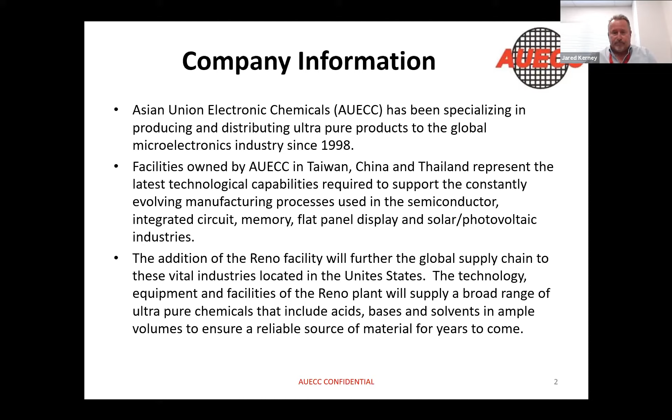We've been in the building since 2017, working through the adjustments of their processes and adjusting the building to our processes. The walls of the building, the structure, the foundation, and some of the equipment from Alcoa turned out to be a perfect match. And then where it wasn't, we've gone and done the necessary demolition work.

We have about 110,000 square feet of building space in the main building. And then we have some outer buildings that will support some of our other chemical distillation, such as solvent distillation and solvent storage, just from a safety impact. We're really focused on the environmental impacts and safety aspects because of the materials we're dealing with.

AUECC does not generate or produce the molecules that we're cleaning up. We purchase industrial grade materials from various sources. Some of the sulfuric acid and some of the anhydrous ammonia will come right out of the Martinez, California or Stockton, California areas. Some of the nitric and hydrochloric acid will also be domestic and then also Asia supplied.

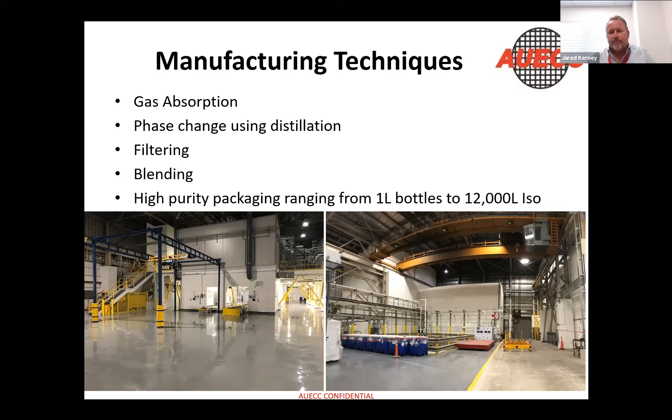All of these materials are in high demand with the chip manufacturing because it's an all-time record. The output and the growth in microelectronics will continue. So it's important that we're able to provide the necessary chemicals they need for their growth as well.

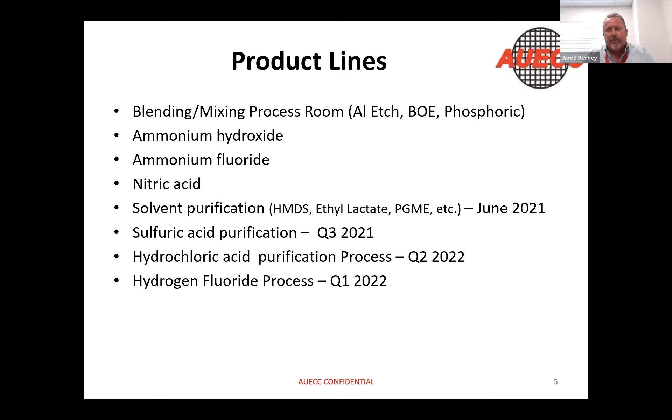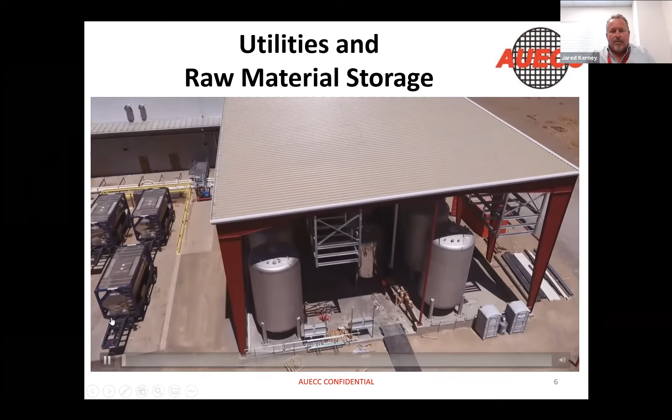The tank farm, we have 14 tanks in there, ranging typically in about 5,000 to 7,000 gallons worth of product.

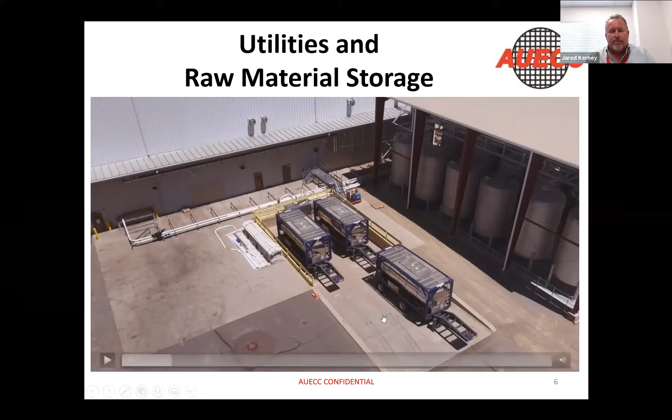The ISO containers I was talking about, this is our fleet of 12,000 liter containers. They're a stainless steel vessel that's Teflon lined to ensure that the materials we ship are kept ultra pure, not picking up impurities from the containers they're sitting in. And we have several hundred of these in our company that we're able to dedicate to the customer, to the chemistry, and be able to have enough of them floating around to make sure that they're not going to run out of supply.

We're going to see the back part of the utilities of our facility. As I said, we're sitting on about 53 acres of property. When we did the initial concepts of the business, we wanted to be able to sustain here effectively in the event of power outages or water shortages.

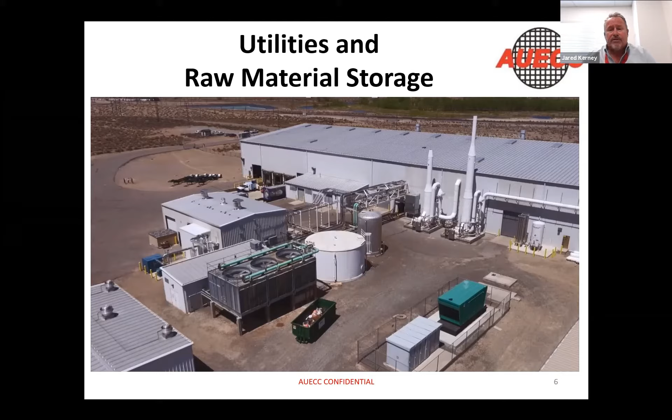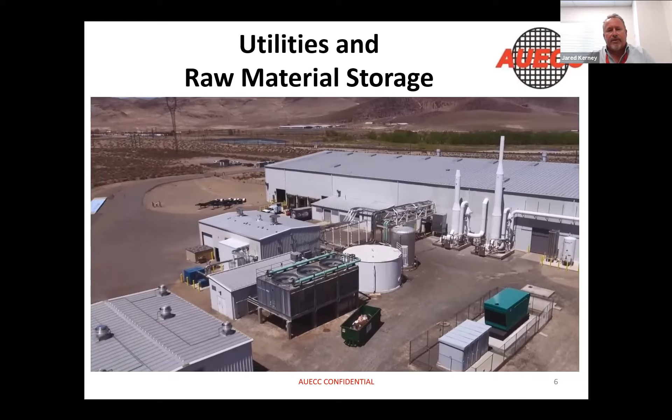I'll go ahead and continue with the fly around. Our shipping department is on the west end of the property, so we have docks to load drums and totes into dry vans or refrigerated containers for chemistry environments so they don't freeze. Some of our chemistry freezes at 50 and 65 degrees Fahrenheit.

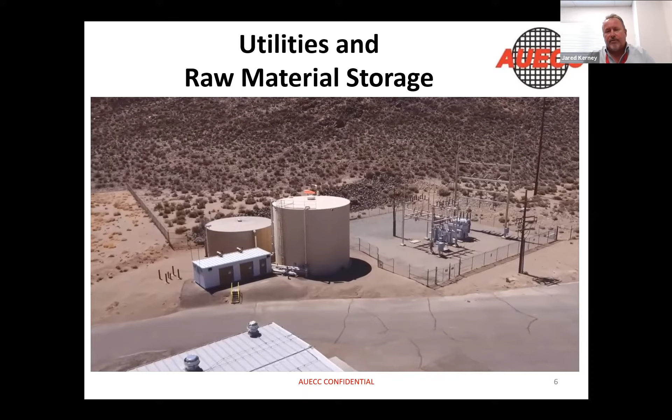We're swinging around, you can see we have a great power supply coming right off of NV Energy's power station into our local distribution here. We also have two fire tanks in the background. We're fully set up with our own fire system, holding 300,000 gallons of fire water on site. We also have two Detroit diesel fire pumps to pump water through our system.

You'll see in a few minutes we have boiler capacity, and we're targeting almost zero discharge here. Other than domestic waste, we will neutralize all of our waste generated on site, distill it, and reutilize the clean water in our cooling process. Any condensed solids that come out over time might be a small waste stream we send out, but we're very proud of the engineering we've put in place to minimize our environmental impacts.

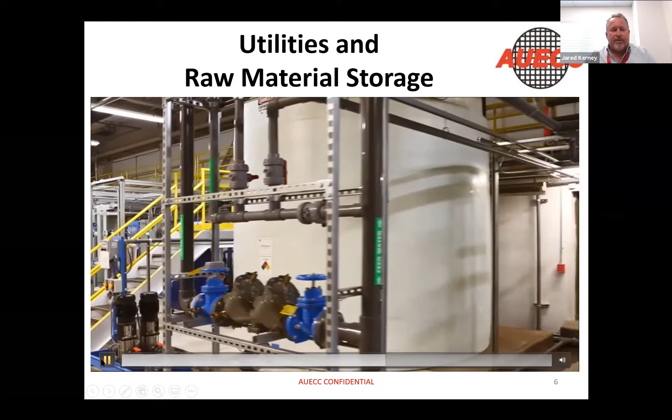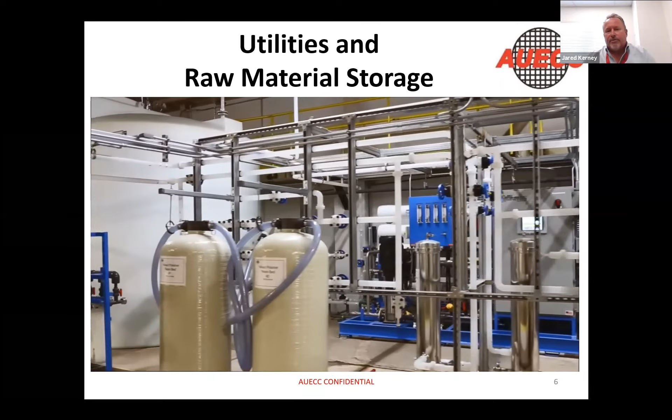This part of the photo is kind of the backbone of our plant. We're on well water here, and we use our well water to make ultra pure water. Ultra pure means we reduce all mineral content and metals in our pure water down to parts per trillion, targeting 10 parts per trillion on most materials except boron, which is very prevalent so we have a higher standard on that.

Overall, our ultra pure water system consists of sand filtration, softened water, an electrodeionization unit (EDI), a reverse osmosis unit, mixed resin beds, and also ultraviolet light to mitigate any growth. That water is extremely important when we start mixing ammonia gas with it to make ammonium hydroxide, one of the critical materials chip manufacturers need in their process.

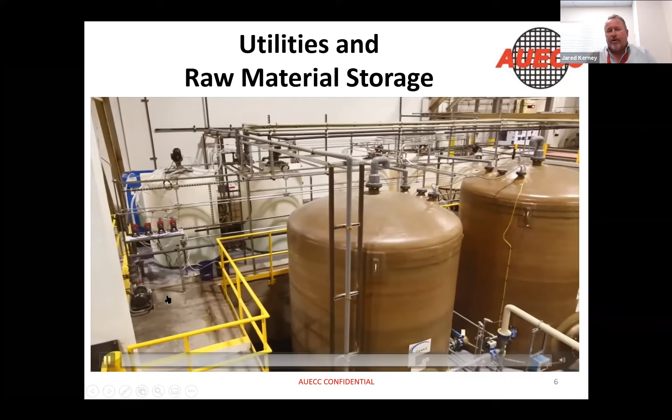I'm going to pick up the video again, and you'll see in the background our waste neutralization center, where we're able to neutralize any acids or bases in our system, bring them back to a pH of 7, and put them in these brown holding tanks. When we have enough capacity, we'll move that to our boiler to distill the wastewater, and recover that distillate to put in our cooling tower so we're not discharging to the publicly owned treatment works. We have quite a capacity here to maintain washing, cleaning, and any ancillary waste that comes out.

This is another photo of one of our utilities. The silver unit is our evaporator that we use to clean up and distill our wastewater, and you'll see the boiler in the background.

The utilities we put in place here at AUECC were really not just to look at our current needs, but to give us expansion capabilities if we wanted to continue to grow and max out our business here.

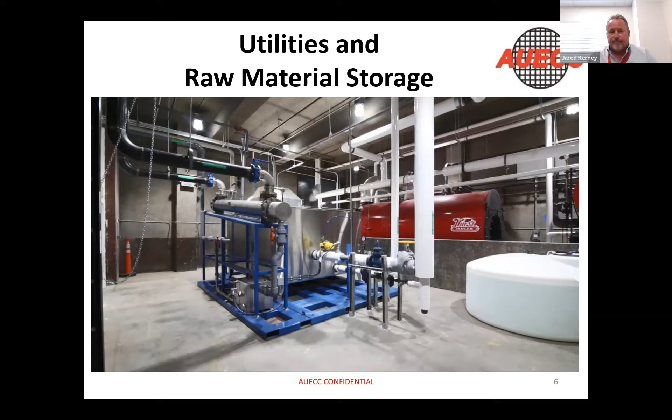These next set of photos, you'd be leaving the front office and starting to walk into the main plant underneath the 100,000 square foot building. And when we took over the business from Alcoa, we had to do quite a bit of retrofitting in the plant to come up to current life safety codes, the current fire safety codes.

And we invested quite a bit of money to build unique process rooms for each chemistry. These process rooms are really designed for containment, for purity, for housekeeping, and also to just give a single focus for that chemistry, so there's no possibility of any contamination from any other processes.

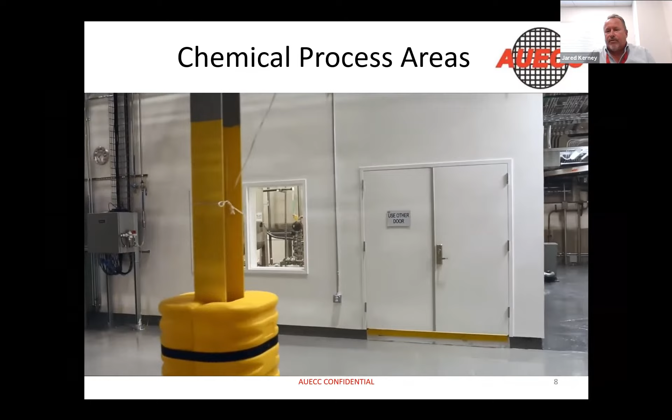We were walking down the aisleway, which will come through our blending and our ammonia rooms, which is ammonium hydroxide and ammonium fluoride. You can see on the walls the blinking green light is an andon light to help our operators know that there's no leaks, there's no risk of any atmospheric air shortage due to the use of nitrogen in the rooms. We also have sensors for ammonia detection and acid gas detection.

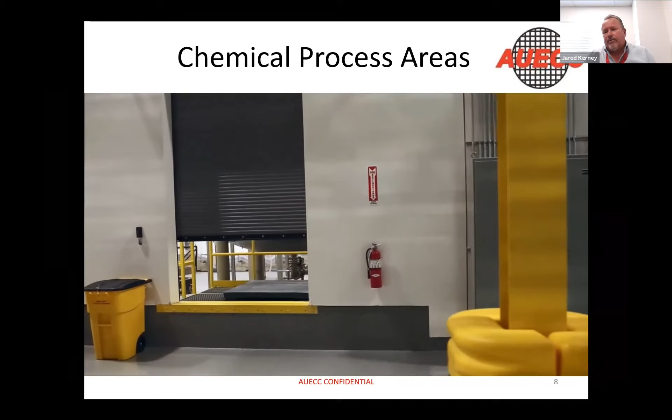They're all contained, like I said, with viewing windows. So if our customers come in and want to get an up close look and do an audit of our facilities, they'll know exactly what we're doing. The rooms have human machine interfaces, or HMIs, for the operators to open and close valves, and also to make any adjustments for flow of materials or turning pumps on and off.

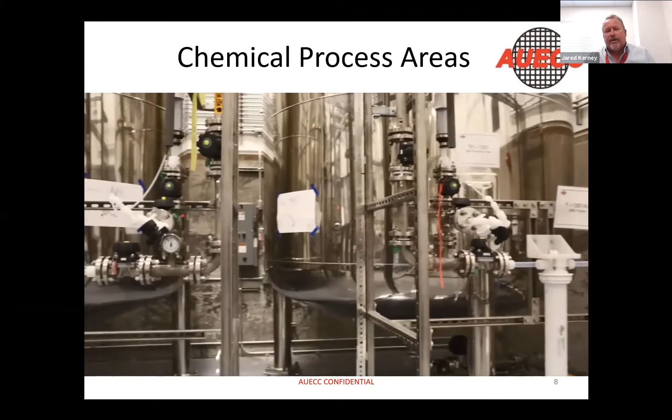This is one of our blending mix rooms. So not only can we make dedicated chemistries, but there are occasions when we'll need to mix a phosphoric, a nitric, and acetic acid together, or some variation, including a surfactant. These small blending tanks allow us to do small scale production to meet those unique R&D needs of our customers.

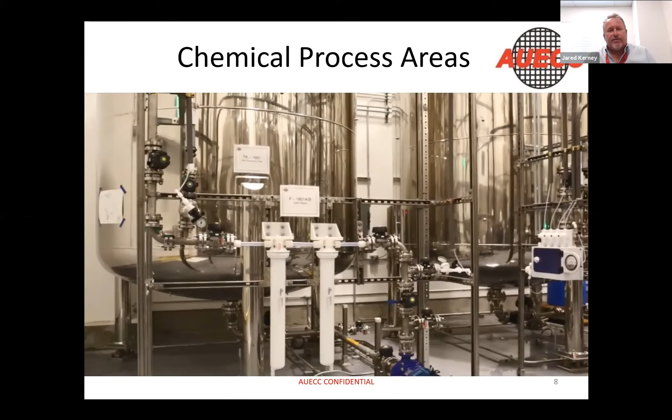And we're seeing, as chip manufacturers are continuing to look to improve their process, we're also trying to give them the competitive edge for doing research work.

The room that you're seeing here is an example of a process room. They're probably 40 by 40 with about a 45-foot ceiling. They're all contained with emergency exhaust system, leak detection. And then all the piping here is very unique and specialized to AUECC.

Obviously, it's stainless steel on the outside, but on the internal linings of the equipment here, it's all Teflon coated, with some proprietary development that we did with some of the manufacturers of this PFA and PTFE linings. That lining helps keep our chemistry clean as it's processing through the plant. So everything you see has basically got like a garden hose, an ultra pure garden hose running through it, that will last for years and years to ensure what we produce here will meet their needs.

This is the ammonium hydroxide, where we'll take anhydrous ammonia and we'll mix it with water to make ammonium hydroxide. And we'll scroll through and let you see the next room too, which is ammonium fluoride.

You can see the sampling stations, the spill containment pits, the gas detection on the walls. And the little kiosk is the human machine interface where the operator will be able to monitor the process and optimize this batching process.

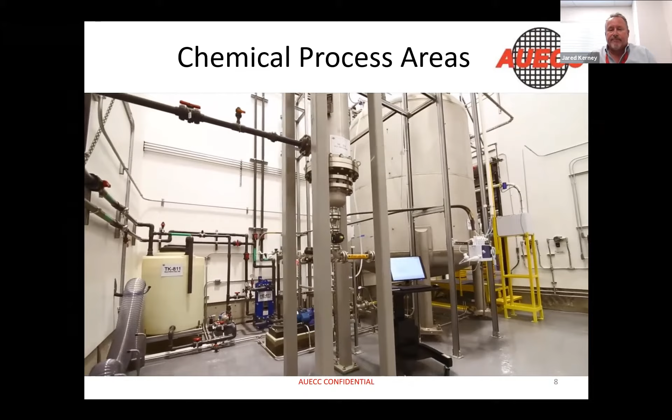This room right here is one of the rooms that is currently in construction. This is nitric acid distillation. So unlike the ammonia rooms where we're doing some gas absorption, now we're going to start to purify our acids using high temperature and boil the product, recover the vapor in distillation columns, and then filter it and then package it.

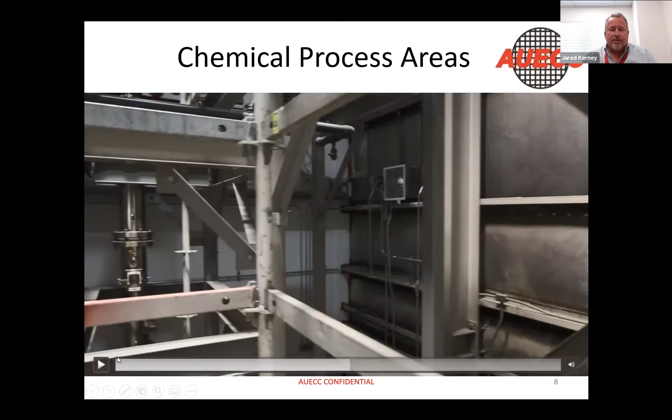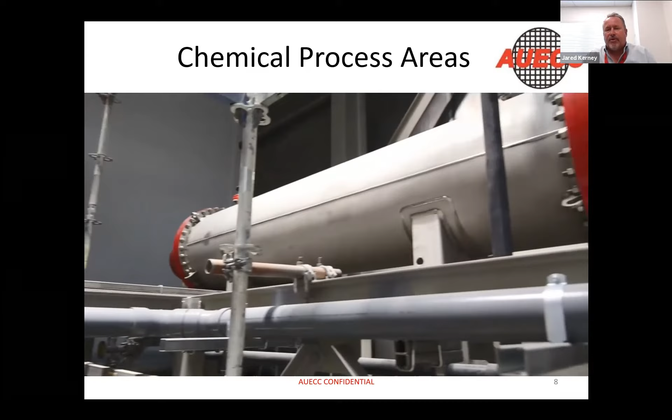This is a little hard to take a video of just because of the scaffolding and some of the support structures we had to put in place, getting ready to interconnect the process piping. Again, if you look at it, it's all stainless steel on the outside, but on the internal guts, it's all lined with high purity Teflon.

This process is one of our exterior buildings. We also do solvent distillations. We're going to be looking at 3 distillation processes in this video. First one is HMDS, or hexamethyl disilazane. We'll be looking at ethyl lactate and also cyclohexanone.

Some of these materials are smaller quantities. These are done in typically drums or 1-liter containers. This room is really unique just because the other materials that we deal with are very strong acids or very strong bases. This room, because we're distilling flammable liquids, takes on a little different safety requirements in which we have to look at electrically rated or electrical hazard classifications for sparks or explosion suppression, etc. So we have a different type of gas detection in here, different type of equipment design, just to make sure that we don't have an incident regarding this type of material.

You'll see in the background that the distillation units are pretty similar to if you take any chemistry classes where you're boiling and distilling and collecting, it's very similar. It's just been scaled up to an industrial scale to make these.

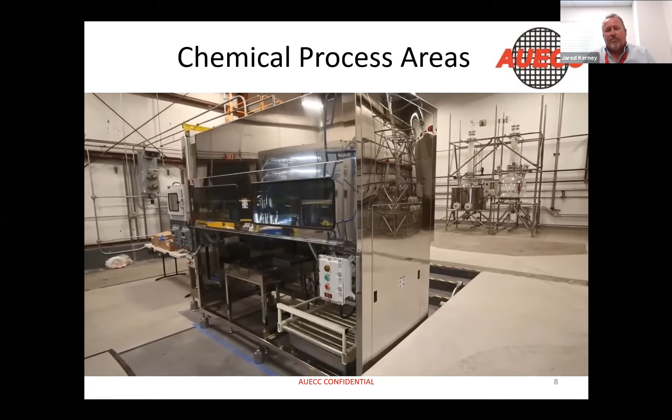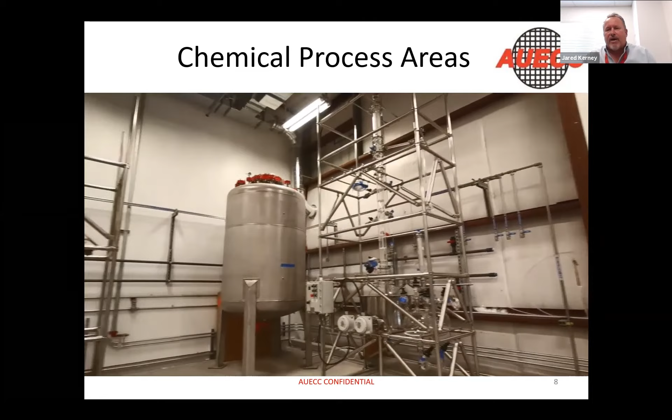The distillation units we have for sulfuric acid are about 10 times bigger than this, but for the solvents, this will give you a good idea of the size of production that will be going. The filling station looks like the Airstream unit on the left, where we'll be filling drums of product, and these are the distillation columns we'll be loading up with chemistry in the next 3 weeks to start our first batches in R&D qualifications with our customers.

They're very similar to your high school or college chemistry class arrangement for chemical trials that we used to do.

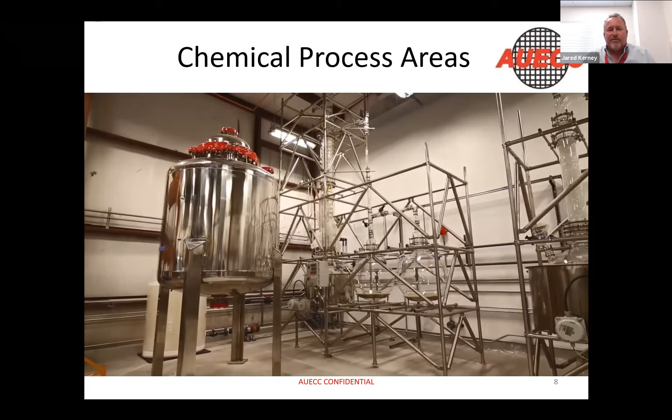This is our sulfuric acid room, currently in construction. We've been working on this room for about 8 months now. Sulfuric acid is one of the primary materials chip manufacturers utilize in their manufacturing process, and this by far will be our biggest throughput of material in the plant every day.

This is one of 4 trains we envision building here on site. We hope to look at building train number 2 late next year or early 2023. Sulfuric acid is a very aggressive material with a very low pH and a very high boiling point, but we'll be boiling it at 600 F to distill and recover it, then filter it and package it once it cools.

This gives you an idea of the infrastructure inside the room for managing an aggressive chemical like that. These vessels are all stainless steel, Teflon lined. The unique difference of the distillation columns here is that they use pure quartz distillation columns, since standard borosilicate glass would not withstand the distillation process. So we use pure quartz in these areas of distillation.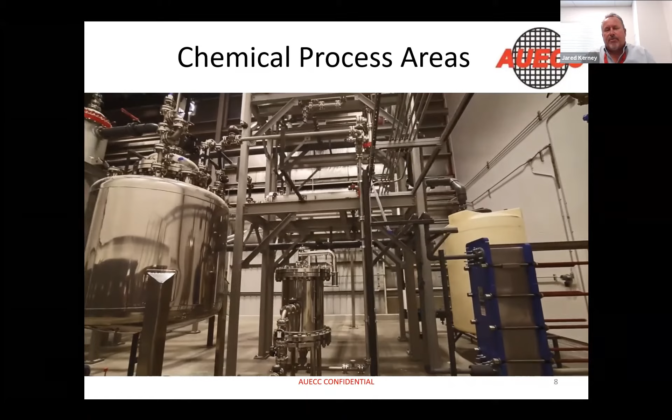Within the process there's always double containment, plus spill containment, and separate isolated cooling loops, so if there's ever a breach in the cooling system it will never get back to the cooling tower. We've gone to great lengths to really isolate these chemical rooms from supply and exhaust ventilation, let alone emergency ventilation.

We anticipate the sulfuric acid room to come online later on in July. We hope that by the middle of July we'll have customer samples available for our North America customers.

This is another one of our process rooms that we'll be utilizing to do some gas absorption. This permitting process is actually going to start taking place next month with the chemical accident prevention team down in Carson. We'll be moving forward with the capital investment in this process. We got some of the tanks early on when the plant was being commissioned, but the integrated process piping and all the other cooling loops will come on in our capital investment in Q1 of 2022.

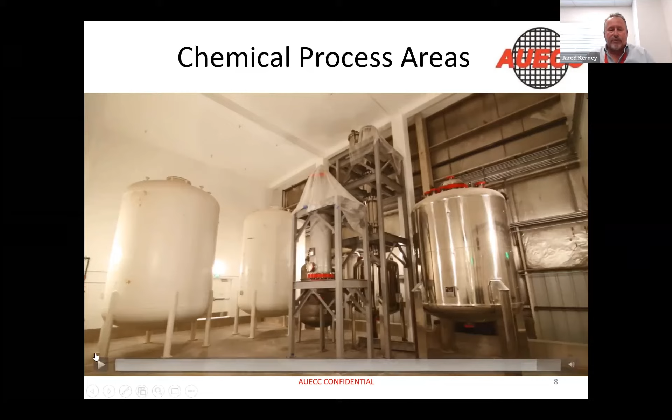This is another unique room. We cover all the major acid groups — this is hydrochloric acid, which is going through its permitting process with the state of Nevada. Unlike sulfuric acid, it doesn't require that special permit. Hydrochloric acid will be produced in a smaller quantity, but is very necessary for unique manufacturing needs within flat panel solar and microelectronics.

This gives you a rough idea of the room size and some of the initial heat exchangers, holding tanks, and stripping columns that will go in. The towers shown in the background will support the glassware used in the distillation process.

I was really surprised to see the solvent distillation units — they're about as tall as a big Christmas tree. But these in the hydrochloric room are a quite different distillation process; these distillation columns will be 32 feet tall. So if you can envision glassware in the room in these structures, purifying that acid to parts per trillion levels with very low particle count — this is something we're very excited for.

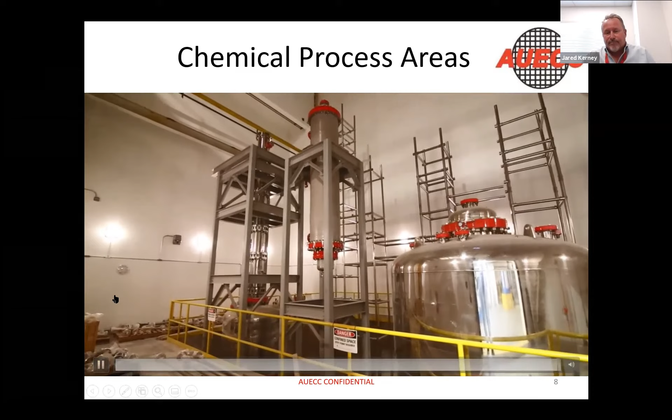This is one of our holding tanks as well, for anhydrous ammonia. AUECC has done a lot of great things in regards to safety — making chemicals of this nature is nothing new to us, so we've taken some of the best practice learnings that we did in Taiwan and China.

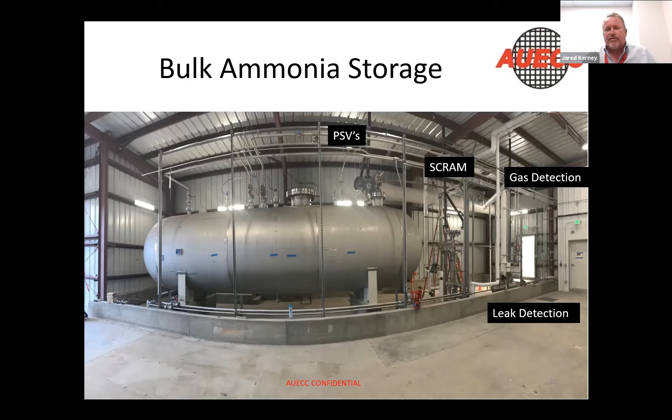One thing I wanted to point out is this emergency exhaust ductwork. If anybody's gone to a farm and seen anhydrous ammonia used, you'll see a tractor pulling a container and raking ammonia into the field — if there's ever a release, it goes to atmosphere. In our scenario, we'll be able to recover the release through our wet scrubbing unit, and this is the ductwork in the back. So when our gas detection detects any ammonia vapor above a targeted level, our scrubber will ramp up and activate, mitigating any release within this room.

This is our packaging unit I'm going to walk you through. So like I said a little bit earlier, we were able to fill a 1 gallon container. We can do a 55-gallon drum. We can do a 265-gallon IBC, or intermediate bulk container, or one of our own fleet of ISO containers, or one of the 6,000-gallon portable tanks that we can move around the world.

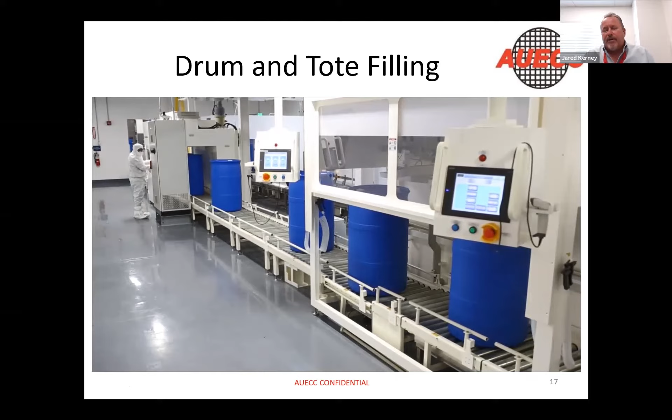Here's one of our operators. This is very early in our commissioning, so it's fairly new, but you can see the clean room expectations where the operator's suit isn't really protecting him, but it's protecting our chemistry from particles that we may shed or introduce. Potassium, magnesium, and calcium are all materials that at 10 parts per trillion, it takes just one particle in 500,000 gallons to make a difference.

In this room, it's all cleared for climate, meaning we're also checking the air coming in and trying to reduce particle contamination. We'll wash and fill with ultra pure water in each one of these ultra pure containers, and then pull the screen down when we're filling to protect the operator. The other unique thing with the system is we'll utilize barcoding and a key lock system when we fill the containers to make sure we don't cross mix any chemistry as we're filling the various products in these drums.

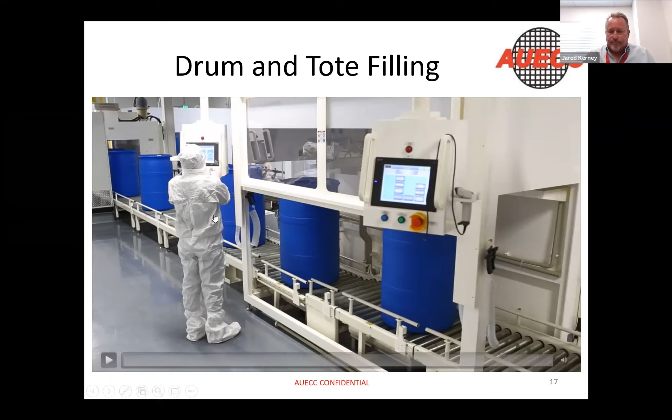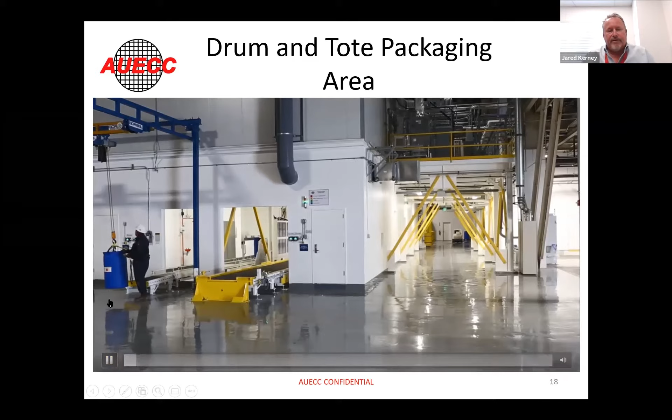Once the products are packaged down the line, we're going to eventually have to load those onto pallets for our smaller quantities. You can see our drum crane there, staging materials. We'll palletize, stretch wrap, label for the DOT requirements, and get those ready for our dry van shipments to hit our customers.

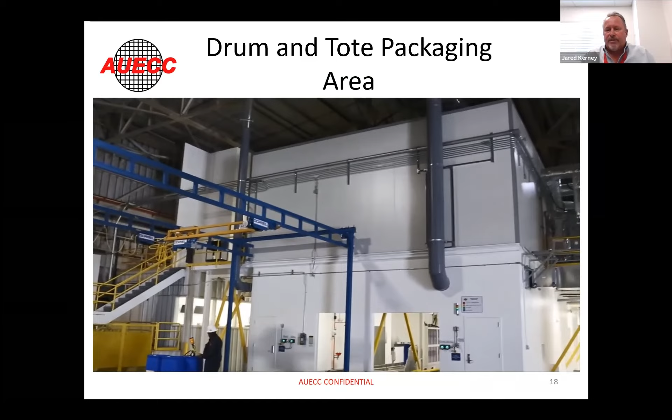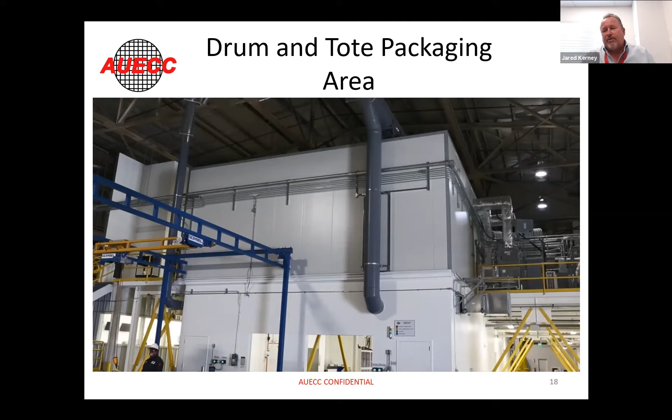As the video points up top, by design we put our laboratory right above our packaging line, for the sole purpose of not only in-process monitoring, but as we're filling our products, we want to do random samples for the beginning, middle, and end of the lots for traceability. Our lab is able to quickly grab samples and run them through the lab to make sure before we release these things for shipment that we've met the customer expectations.

I'll move over to one of the ISO containers here as we're pulling it off one of the flatbed trucks that just dropped one of these units off, as we're training our team to utilize our crane and utilize our storage space within the building. You can see the scale in the background, a red scale—that's what we'll use to weigh the containers to fill content.

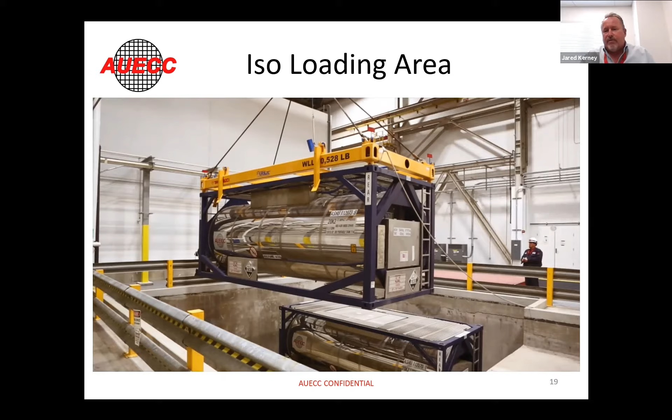And everything is done indoors. Again, it's for purity reasons that we want to make sure that we don't have the desert sand that we're surrounded by contaminating anything around the filling connections, around the filling ports, and so on. So that way, when they're on the road, they're ready to go.

Here's a snapshot of three of our chemical storage rooms. We meet the H3 occupancy requirements. We're storing our materials, and the rooms were designed for climate control to make sure that they don't get too warm and build pressure in the container, or get too cold. The acetic acid likes to freeze right around 61 degrees F, so in the wintertime, it's something we have to be conscious of.

The rooms are also equipped with plenty of spill containment. And even in the event of a fire, if our sprinklers would go off, we're able to recover any fire water that would be dispensed in the room to an underground holding vault, along with the contents in the room. So by design, we are set up fairly well to be able to handle and store our products safely.

I'll walk you a little bit through the lab. If you're making ultra pure products, you have to be able to validate the materials by a certificate of analysis. And we have a clean room lab that we believe is best in class to be able to measure down to the parts per trillion.

This is kind of an envisioning—we'll show you a video of the operator walking through the door. The door is closed behind you for an airlock, and then you come in to do your laboratory work. The room is divided in half, for a couple of reasons—we're trying to meet different clean room requirements. We have a class up here on the right, it talks about clean room and mini environments. We have a class 1000 wet lab.

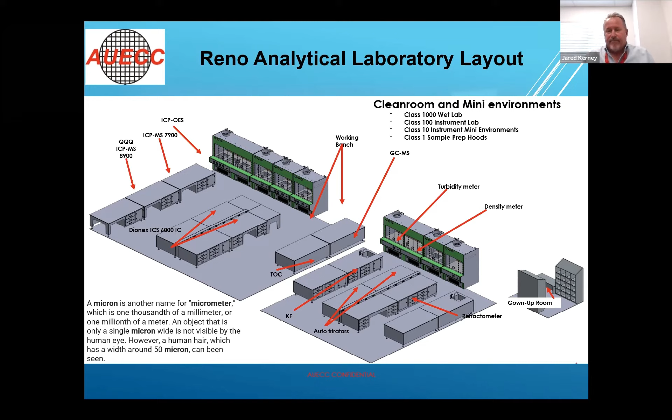These are some of the tests we do with our products: titration, turbidity, surface tension, density. Trace metals is very important to our customers. If you're building a microchip or semiconductor at 7 nanometers, you can't afford to have a small particle drop between that circuitry and short it out. So we're measuring our trace metals down below sub-10 ppt.

I put a little definition down below there. When we're looking at one drop of impurity in 500,000 barrels of water, or traveling 6 inches out of a 93 million mile journey to the sun, this is what we're trying to achieve when we talk ultra-pure. Some of the inductive coupled plasma, the ICP testing machines here, are best in class.

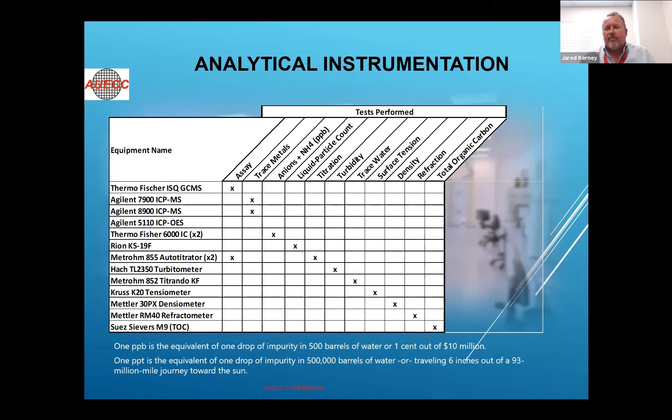We've gone to every great length to make sure our clean room labs meet the classification they need, and that the equipment monitoring the chemistry we produce is highly reliable and can generate that reliable C of A for our customers.

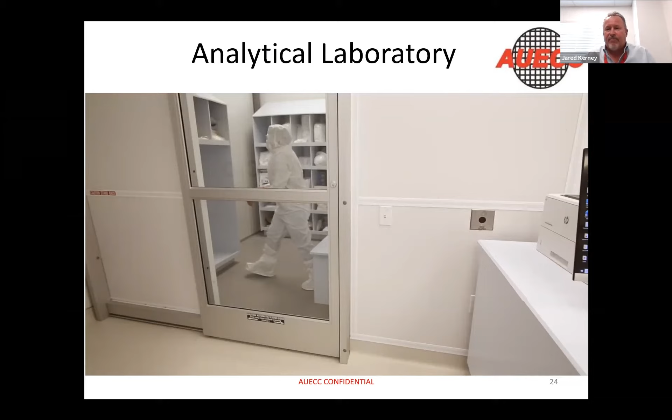This will give you a walkthrough of the laboratory, and Kamaljit here is our demo person, one of our chemists. She's in the gowning station before entering the wet lab. Once the wet lab door closes, we'll follow into the analytical lab where we do our trace metals testing. This gives you a rough idea of what we do to sample prep and measure our chemistry here at AUECC.

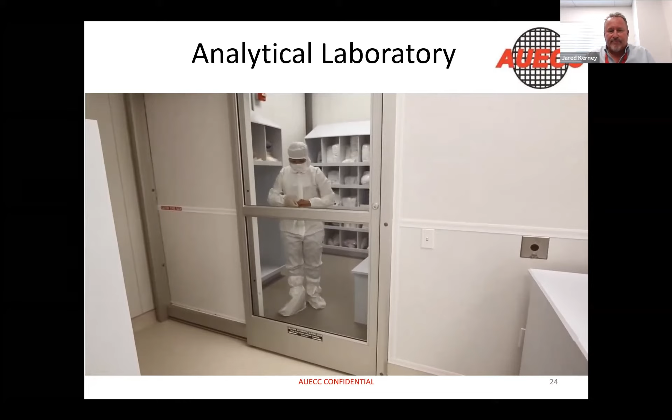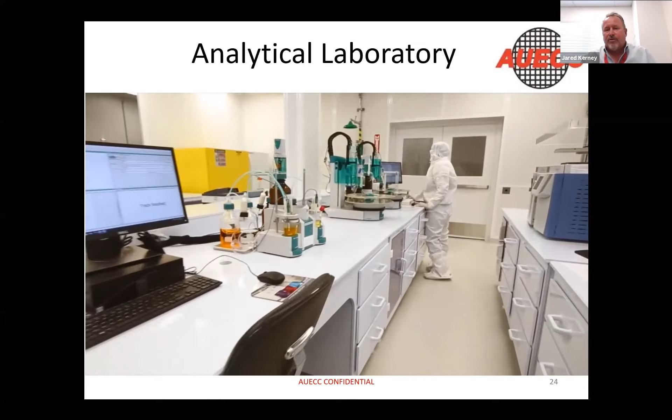As I said, she has protective covers on her hands for touching the chemistry, but the clean room bunny suit is there really to ensure we don't introduce particles into the environment, and that's why those gowns are being worn.

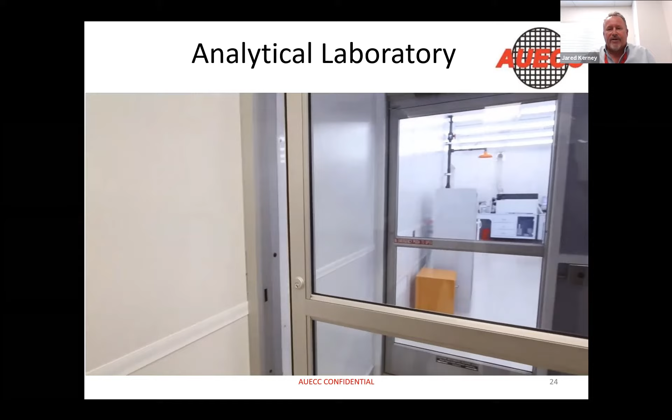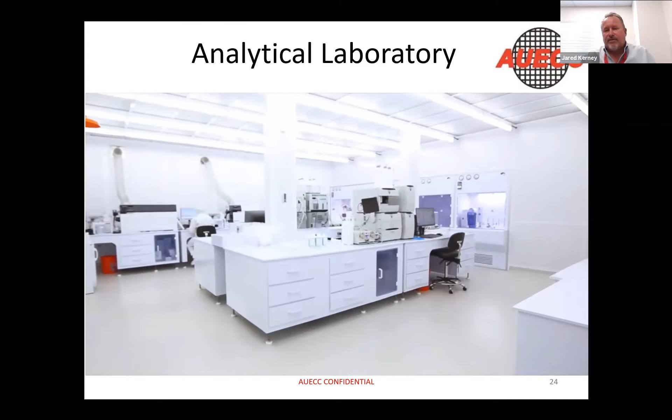We're passing through the wet lab now, working our way over to the next airlock. We'll walk into the trace metals laboratory where we look at metal analysis. This is where the clean room classification went from class 1000 to class 100, and inside the fume hoods we're down to class 10 and class 1 clean rooms.

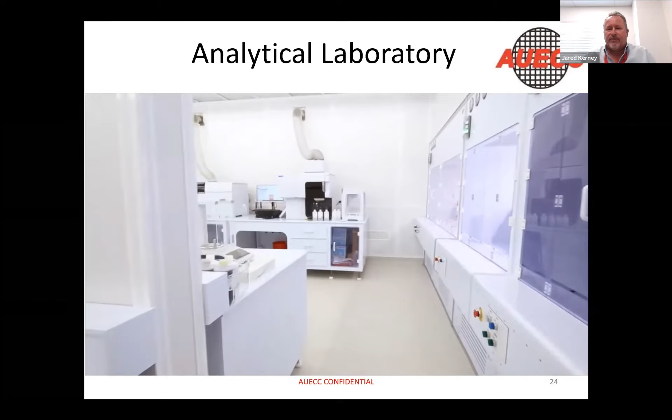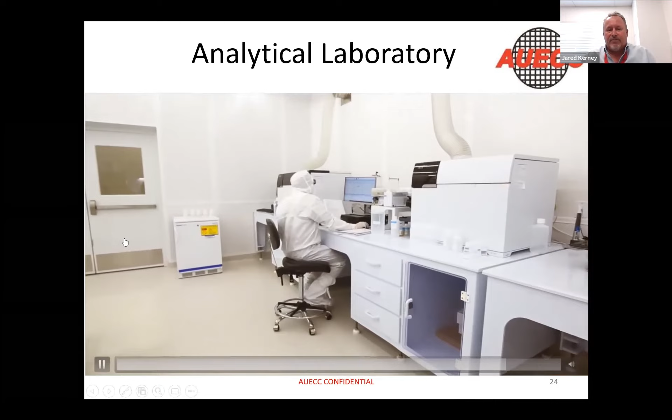All the furniture in there is by design, with very limited metal surfacing. It's all plastic for a reason—not only to handle chemical contact, but to make sure there's no particle shed as well.

Pretty much wraps up the presentation for today.

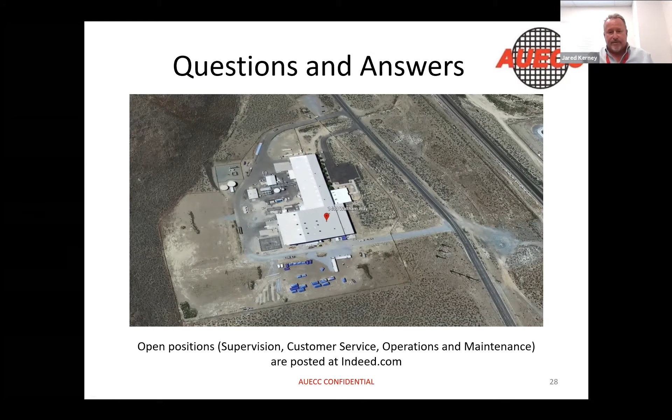Rich Tower was asking, do you supply the mining industry at all? Currently, we do not.

Typically, our chemistry is ultra pure compared to industrial grade. But if the mining industry needs that next level of purity, we would definitely be interested in conversations. There's a couple users in the industrial park here at USA Parkway that we believe will have a need for it. But because of the purity of our chemistry, most people don't need to pay that extra buck for what they're using it for in their application.

Tim Grant was asking, what MRP system are you guys using? Sure, so we are using Oracle in Taiwan, and did not deploy that here in the U.S. at this time. We elected to go with Fishbowl for our short-term implementation, and we also use MapCon for our computerized maintenance management system. We look to pull the Oracle tool over in probably two years once we stabilize it in our Taiwan office.

Now, I think you mentioned there was R&D work done in the facility, but that was a question of Rich's, if you guys are doing any R&D work there. Yeah, absolutely. So some of the blended compounds, the aluminum etches, the buffered oxide etchants, some of those we work in partnership with our fabrication shops, the fabs, in order to help dial in the chemistry that works best for the photolithography or the etching processes or the edge beads that take place on the silicon wafers.